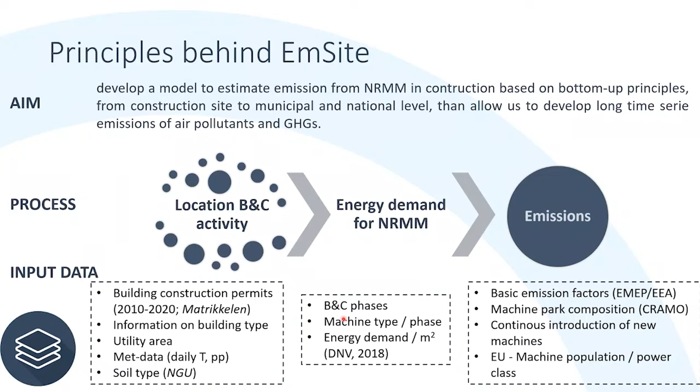So the process that we designed was first to identify the location of all building and construction activity, both in space and time. From there, allocate the energy demand for the machinery, to finalize with the estimate of emissions. As we saw before in NERF, we like to work with a lot of data, combining different data sets. And in order to achieve all these steps, there has been a lot of data processing and basic data searching as well, which is very demanding. So I will not go in detail now on all the input data because it comes later on.

For example, when we talk about the location of building and construction activity, where this activity happened, we have worked with the building and construction permits in Norway, the entire data set that we call the matrikkelen. So we have the data from 2010 to 2020, where we have information on building type and utility area. The construction permits are split by whether we are talking about building construction or demolition, and at the same time, which type of building it is, for example, apartment building, a school, or detached houses.

I must say that to reach this database and to understand it, we have to thank Trondheim Kommune. There was a person there who helped us very much to understand that this was the database we needed. At the same time, we combine this information with meteorological data, specifically daily temperature and precipitation for each point where we have a construction permit, and also soil type. The soil type is quite important for two parts.

One, because we establish ground conditions, simple or difficult. As you can imagine, if it's simple, the amount of machinery needed is different than if it's a very difficult ground condition, but also the silt content, the type of material, this will determine the non-exhaust emissions.

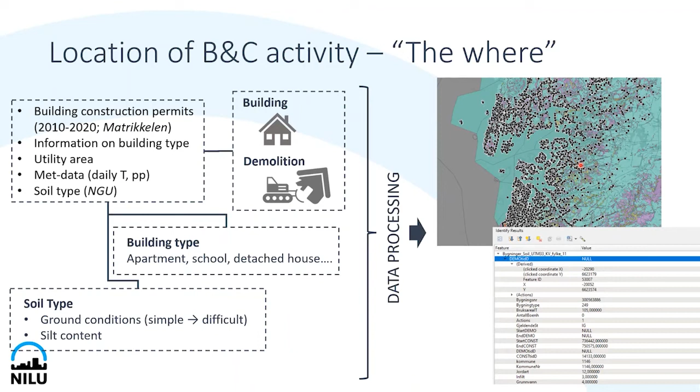The construction permit is not always so easy to use. Sometimes we have the start and the end date that is well defined. Sometimes we have only the start or the ending. And sometimes we have a start or end, but it's not very well constrained. So we need to identify the construction permit when it happens. Sometimes it's within 1 year, but sometimes it covers several years.

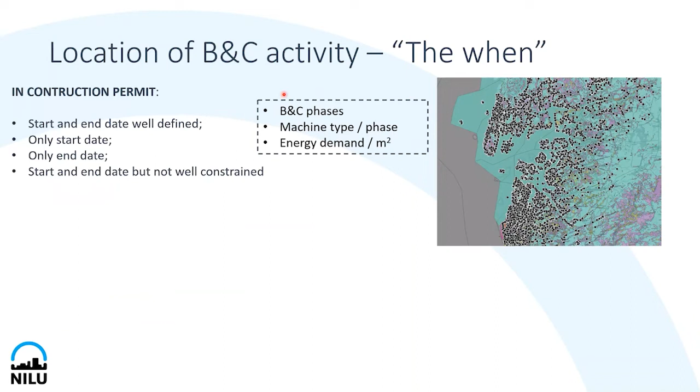But also we need to identify the different phases within construction. So for this, we use information based on a report that uses information on real construction projects. So what we did for each single construction permit, we apply a parameterization that assumes an average of 15% of the initial time is for administration, 5% for excavation, and then comes foundation, activities over the foundation,

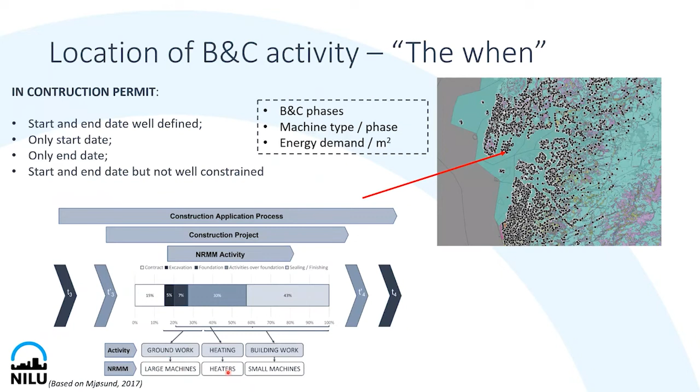and the finalization of the building. So this allows us to establish 3 different phases: groundwork, heating, and the building work, where we associate also different machines active during these phases. That is the large machines, the LPG heaters or diesel generators, and the small machines.

So applying all this time parameterization allows us to see, for example, here we can see Oslo and the surrounding municipalities. This is the year 2020, and we see construction activity expressed in square meters. So the bigger the square, the bigger the construction activity. So we can identify the most important development work that has been going on in Oslo, but also in Lorenskog that has been going through intensive construction activity.

But it also allows us to observe over time, since we have 2010 to 2020, how the building area has been active. What we have done here is to compare with SSB data. SSB reports building construction area if it has started in a specific year or if it has been completed in a specific year. So we individualized from our data set also projects that start and finalize in those years to compare, as some kind of validation.

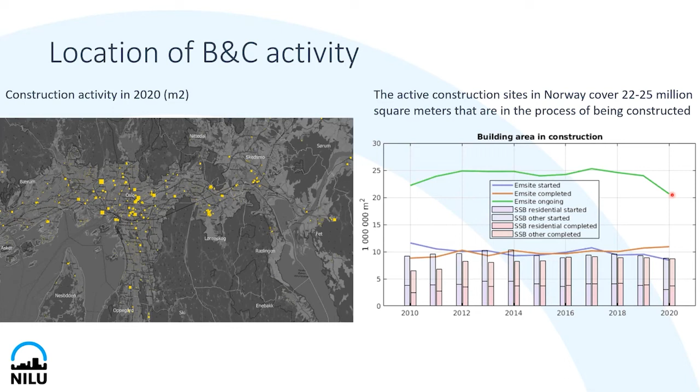We see that it is approximately consistent. There are some years that show some discrepancies that are not so easy to explain. But what is important to bear in mind is that construction activity sometimes takes several years. So what is active is what is represented here with the green line. So approximately, between 22 and 25 million square meters has been active as construction in Norway.

So we have now the 3 different phases, and we need to allocate an energy demand. What we did was to allocate energy demand established by Norske Veritas in 2018. And in the case of groundwork, we distinguish between simple and difficult conditions based on the data on soil. As you can see, they suggest different values.

In the case of heating, we also use Norske Veritas, but at the same time, we distribute it in time based on the heating degree day. So heating will be active during the winter months and autumn, and we don't have heating activity during summer. And then the building work is the one where we allocate the lowest energy demand, and it's different if we are talking about a big building block or a house.

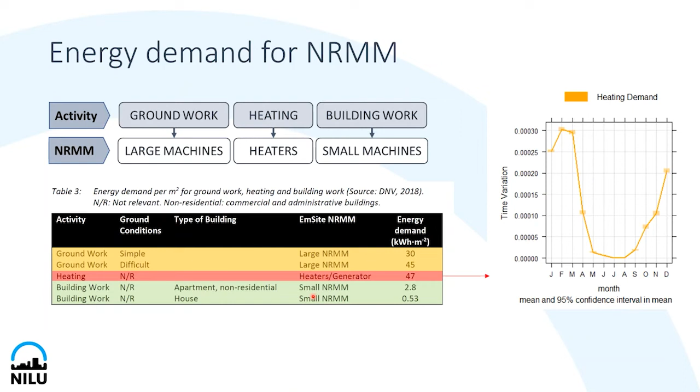So a little bit of a summary. We have now Norway. We use the grid, the SSB 250 meters grid. We know the activity in square meters. We have now the grid in kilowatt hours and split in 3 different phases. But what we want to have is emissions. As in each phase we allocate different types of machinery being active, what we need to do now is to define emission factors for these types of machinery.

So what we did was to define specific dynamic emission factors for EmSite. We use as basis the emission factors suggested by the European Environment Agency, where we have different technology classes called stages, equivalent to Euro classes in road transport, and different engine power. We need to define a fleet composition for Norway that also changes over time.

We were quite lucky to get collaboration with Cramo. They shared their database concerning their fleet, their fleet machinery, let's call it. And here, this is the example of diesel.

What we did was consider the Cramo fleet composition representative for Norway, and then we went backwards, assuming a continuous introduction of new technologies. We can see how the oldest stages are disappearing, and the newer, more modern stages are becoming more abundant. But as emission factor per technology also depends enormously on the type of machine, we have to use the relative machine population in Europe per power class to get these emission factors.

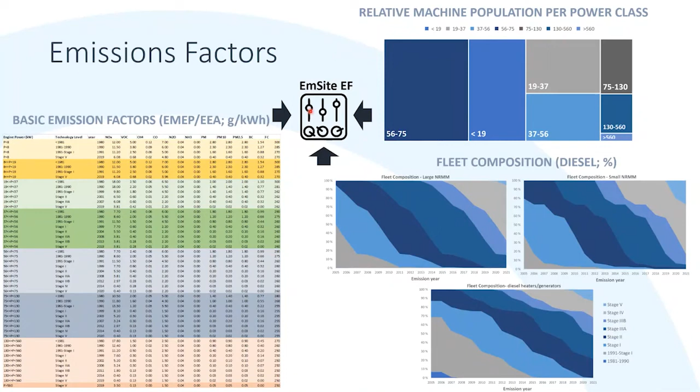And then we got to the non-exhaust emissions. This is quite challenging work, I must say. We use the basic approach suggested by the European Environment Agency, where non-exhaust emissions depend on the emission factor, the area, the duration, the control emission technique applied, the precipitation-evaporation index, and the silt content, which depends very much on the type of material. However, we are uncertain about this very simplistic method, which process in reality it represents, and this is not explained anywhere.

For example, in a construction site, we have non-exhaust emissions associated with groundwork, with the movement of material, with material that gets stuck into the tires, but also with the movement both of machinery and of heavy-duty vehicles that get in and out of the construction site. So we are not very sure which processes are included here, but also which fraction represents PM10 or even coarser particles. With these uncertainties, we work with this method.

The first thing we did was to modify the precipitation-evaporation index that depends on precipitation and temperature, because it's expressed on a monthly basis, and we need to work on a daily basis. So we use a precipitation-evaporation index suggested by the same author, which in this case depends only on temperature and solar radiation.

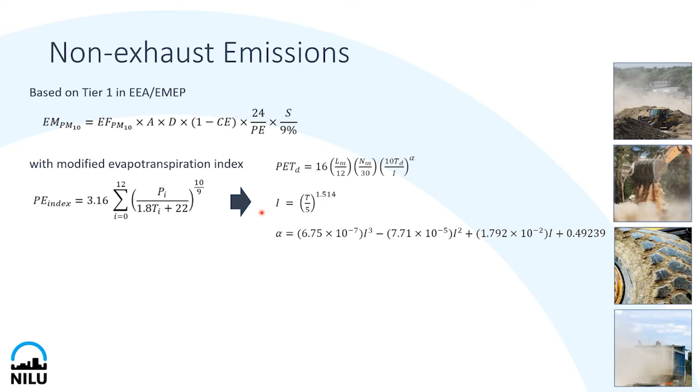In order to account for the moisture of the soil, we developed a dust emission potential based on solar radiation, temperature, and precipitation, so that it can describe the changes in surface moisture. Here we can see how it will be on average for Norway, represented in black, and then for different regions depending on their meteorological conditions.

As we can see, the non-exhaust emissions are especially important in spring and summer, during the dry periods.

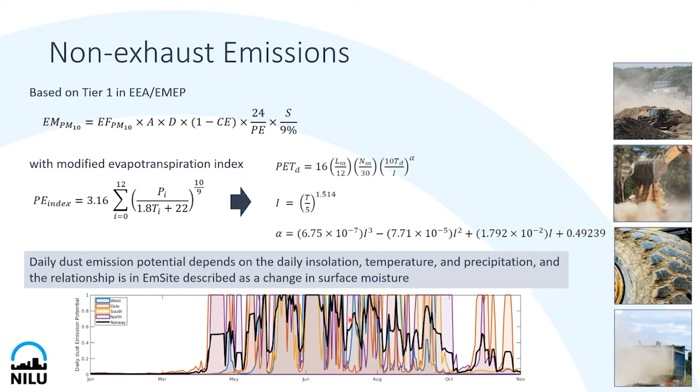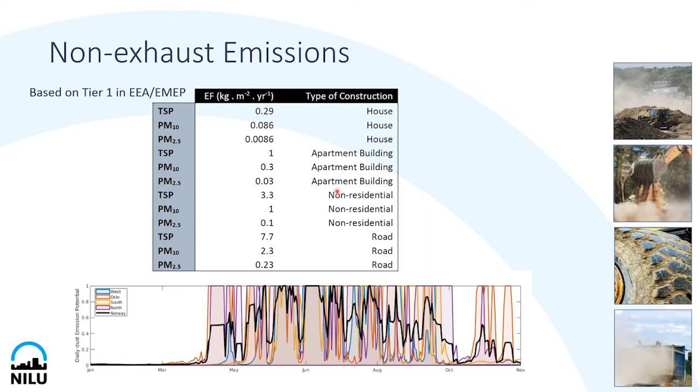Emission factors we use are suggested by the European Environment Agency, and they differ depending on the type of building, but as this information is tabulated, it's not a problem to apply.

If we go a little bit to the results, here we can see for the entire Norway, the PM10 is dominated by the non-exhaust emissions, even though we suspect that we are underestimating because we don't represent all the processes. PM2.5 and NOx decrease over time, very much associated with the introduction of new technologies.

If we compare, for example, Norway's NOx emissions with those officially reported at national level, we can see important differences. Here you can see EmSite as a line and officially reported values as columns. So especially in early years, we have much higher emissions than those reported in Norway.

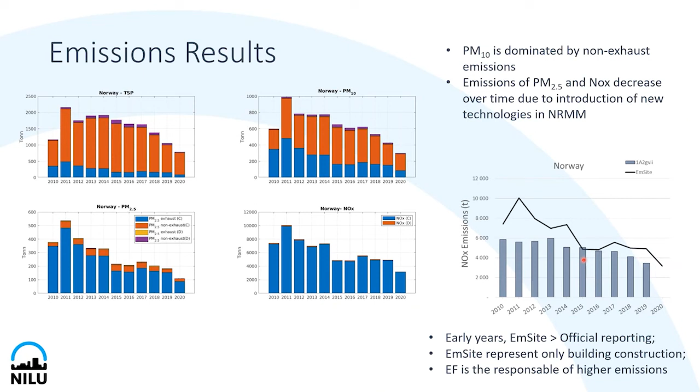As we are treating only building construction, we are missing important activities such as road construction or other types of projects. The most logical reason is that emission factors are behind this difference. So what we did was first compare EmSite emission factors with SSB emission factors used for official reporting. Here in gray, you see EmSite for large, small machines or diesel generators, and the emission factors are quite low in SSB but quite high in EmSite.

The reason for this difference is not easy to pin down, as SSB does not explain in detail how these emission factors are weighted and estimated. We compared as well with emission factors used by Miljødirektoratet in the assessment of external cost of machinery used in construction, and in this case, our emission factors are quite similar. Here we have the emission factor used by Miljødirektoratet with three different stages, 3, 4, or 5, depending on the power of the machine. I must say that based on the Cramo database, approximately between 60 and 70% of the machines we have are stage 3, just for indication.

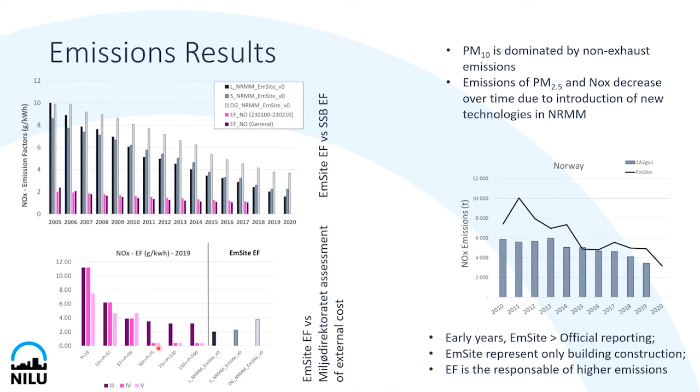If we look at CO2, building and construction activity has been relatively stable until 2020. Here we do not see the important decrease that we saw for NOx emissions, and it's because CO2 does not depend so strongly on technology as air pollutants do. This is the reason we don't observe this important decrease.

Fuel-wise, as we know, diesel is the mostly used fuel, followed by LPG in the case of heaters. So diesel is the main fuel and the main responsible for emissions.

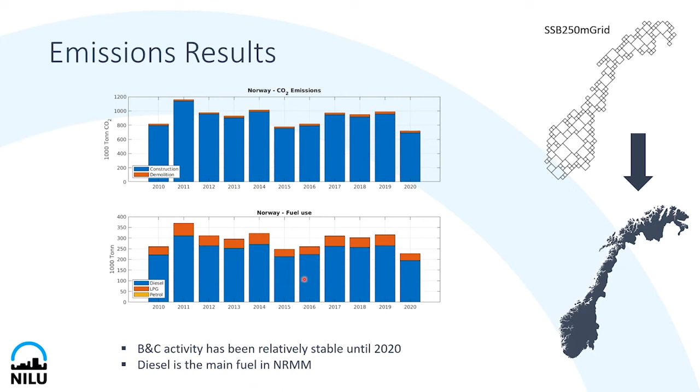If we go at communal level, one of the things that we did was to compare EmSite with the previous CO2 reported per comuna in the Klimatregnskap published by Miljødirektoratet. I must say that this is based on the methodology previous to 2022, because in 2022 this methodology has changed.

And many years back, we suspected that emission from machinery in the Klimatregnskap were overestimated in some municipalities, especially big municipalities with a lot of business going on or big population density, like, for example, Oslo. When we compare EmSite with the Klimatregnskap CO2 emission for Oslo, we see that we have important differences. In our case, EmSite shows much lower values.

When you overallocate emissions in a municipality because of the proxies that you use, then you have to underestimate in another one, obviously. And this is what we saw, for example, for Lørenskog. In the Klimatregnskap, emissions were relatively low, but EmSite show much higher values that correlate with the intensive construction activity that the municipality has been going on in the last years.

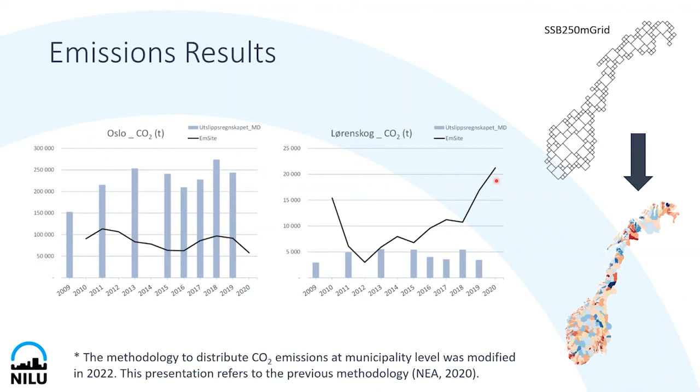And just to finalize, I must say that this is a first step. There are many aspects that are not considered, and not because we didn't want it, it's because it's not easy to get the needed input data.

And here we need to emphasize that we need to include the construction of infrastructures other than buildings, for example, road construction, biofuels. Biofuels is quite important in some municipalities, especially those with procurements in place for the use of biofuels. This will have an effect on CO2, but much lower on air pollutants.

The use of electric machinery has increased very much in the last year, especially in some municipalities, so it needs to be considered. And also alternative energy sources, for example, in the heating phase. Part of the heating phase in the construction can run on electricity.

And finally, and not less important, the non-exhaust emissions need to be further evaluated, and probably with other methods than modeling, because there are different processes that influence emission, but also that can affect road emissions in the vicinity of construction sites.

With this, thanks for your attention.